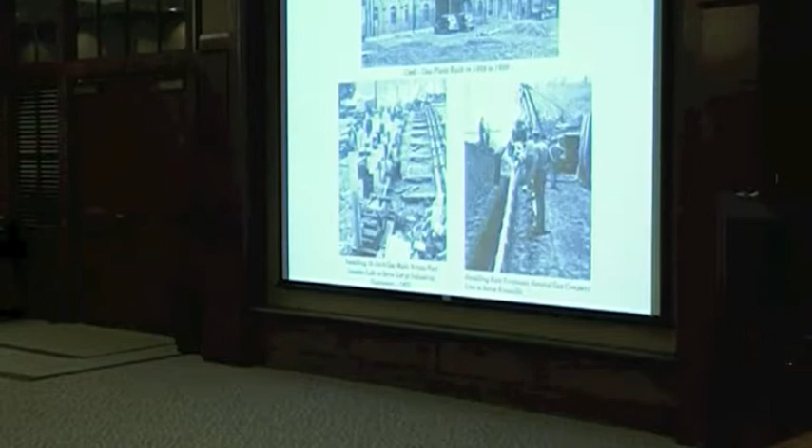In the lower pictures, you can see a picture of the old style installation of the pipe. You can see all the joints in the pipe right here that you wouldn't find today. And on the right-hand side is a picture of the pipe actually coming into Knoxville from the interstate pipeline—a very big change for the system here.

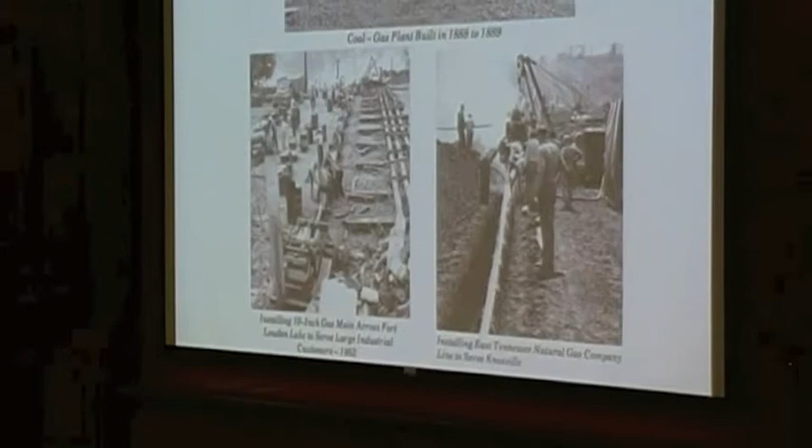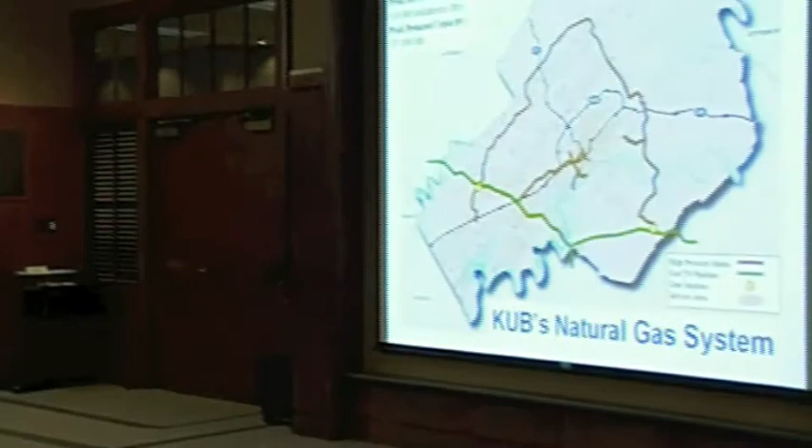We're served by a natural gas pipeline, East Tennessee Natural Gas. It comes into Knox County right about here, which is roughly the intersection of Pellissippi Parkway and Melton Hill Lake. The pipeline comes over right about there. It then transverses the county to right here, which is basically Topside Road, Alcoa Highway, right where we enter into Blount County. And it exits the county over here, which is roughly by Chapman Highway, right about where Seymour is. So the pipeline bisects the county like this.

We have a series of high pressure lines, one that loops all the way around from point to point, these yellow points being where we take gas. We take gas from the pipeline to 2 major points.

We have a system that loops all the way around from point to point, providing access to our system going both directions, feeding both into and out of the system. There's also another high pressure line that comes right into downtown Knoxville. All the little yellow lines you see here are the actual distribution pipes that are in your neighborhood and on your street. That's a representation of our system right there.

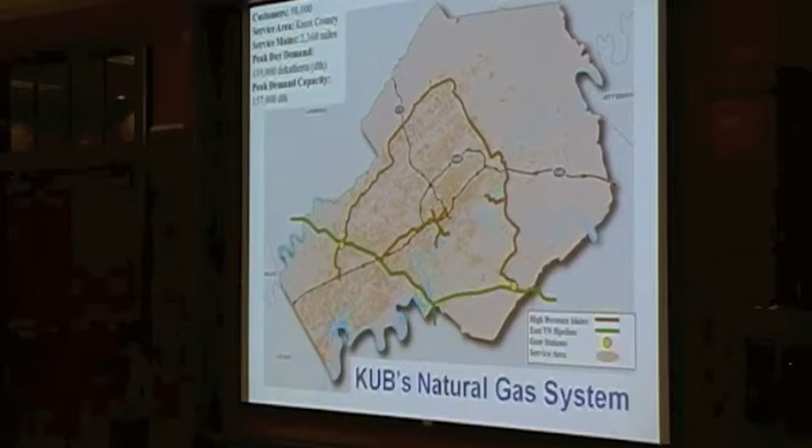A little bit of history. Let me switch gears now and talk about a different aspect of the gas system, which is the fact that it is very highly regulated. The first regulation came down in 1970. Prior to that time, gas systems like ours and others were regulated, if you will, by best practices to some extent. In 1970, that changed with the passage of the Pipeline Safety Act.

Since that time, and even more recently, there's been more and more regulations that have come down. To a large extent, regulations are formulated in response to various incidents that occur out in the domain, and they've taken different forms over time.

For example, the control room management program. That's a regulation that dictates how long your employees can work in the control room, the number of hours. There are regulations that establish the drug testing requirements for our employees, and regulations that establish the training they have to undergo and the way they are certified to do their jobs. And more recently, the most recent regulation is the Distribution Integrity Management Program, or what we refer to as DIMP.

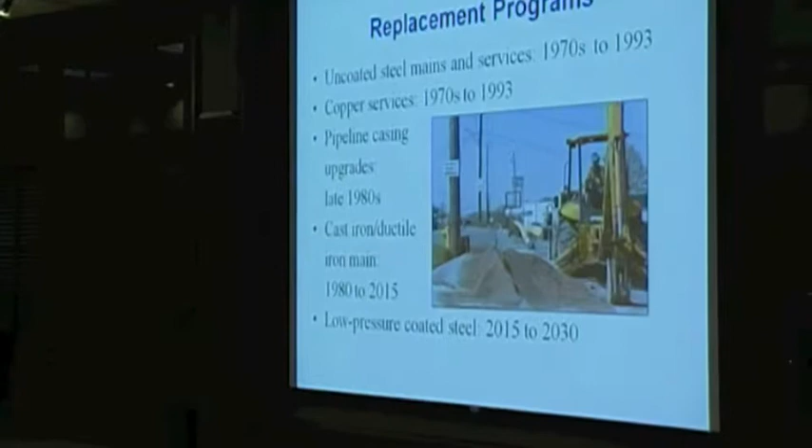Starting in the 70s, not coincidentally about the same time regulations came out, the gas system started with some fairly significant replacement programs. The first one was to replace the uncoated steel. Next, copper services, we replaced pipeline casing upgrades. For the last 30 years or so, we've been working on replacing the cast ductile iron pipe. That's supposed to be finished in a couple of years, in 2015. After that, we'll move to our low pressure steel pipe.

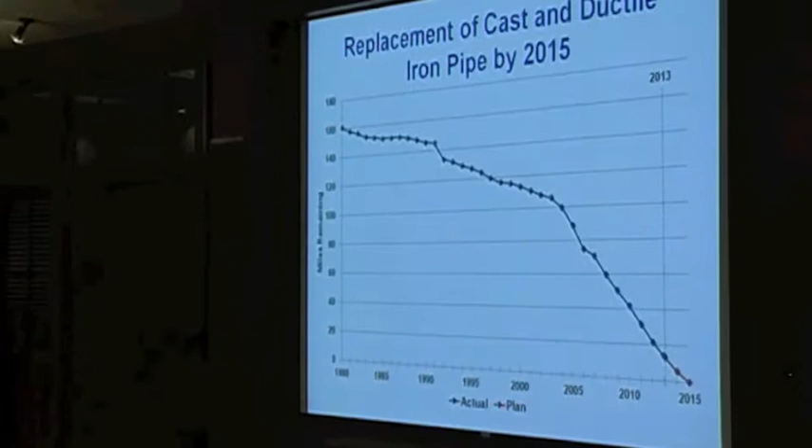While we have it on the chart here and listing all these things, I think it's more dramatic to think about it when you look at it year by year. This is actually the replacement history of our cast ductile iron pipe. And you'll see that we started out with almost 160 miles of pipe when we started the program. And now, as we're towards the end, we've got about 8 to 10 miles left to be replaced over the next 18 months or so.

The only way you can get 160 miles of pipe replaced is to do it methodically, systematically, consistently. The idea that you can make progress on replacement programs in a start-stop mode just doesn't work. All these programs from the previous slide, whether it was uncoated steel mains or cast ductile iron, are all programs that have to be multi-year long, multi-year funded, multi-year thought about. And that's one thing that's really consistent among all of our utility systems, is everything's a long-term investment, long-term outlook.

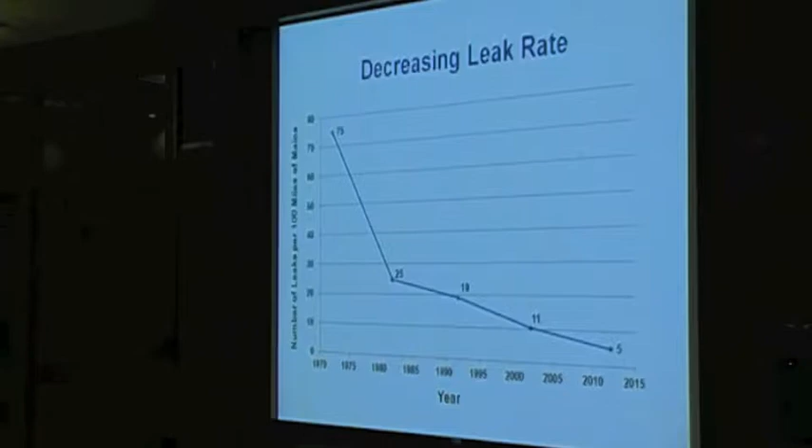Now the benefit, and the reason you're going after all these replacement projects, is the significantly reduced leak rate. If you go back in time and look at our leak rates per 100 miles of main, you'll see it's dramatically decreased. Just over the past decade, we've cut the leak rate on our system in half, going from 11 down to 5. So the proof's in the pudding, if you will, and the benefit of all the replacement programs we are undertaking is shown fairly dramatically right here on this graph.

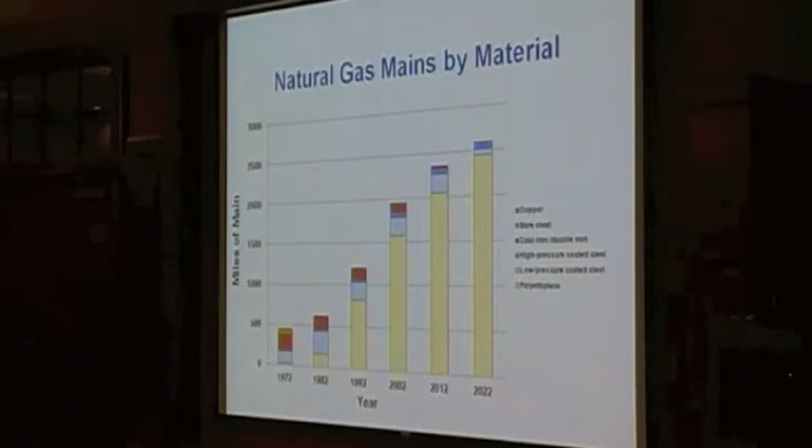So the combination of the history of growth and the sustained 40-year effort toward replacement programs has materially changed the system, materially increased the safety of the system, and the reliability of the system as well. What's the life of the polyethylene? Well, we'll talk about that.

Before you do that, yes ma'am. Can you tell me in what situations the high-pressure coated steel is more appropriate than the polyethylene?

Yes, the polyethylene has a pressure rating depending on the pipe. We don't run it more than 60 pounds. High-pressure steel can run 200, and depending on the grade, up to 600 pounds. We don't currently have anything over 200, but we'll likely have something around 400. So it's a capacity issue. That's what it is.

Chair Anderson asked about the life of polyethylene pipe. Now that we're 90+% relying on polyethylene pipe, let's spend a little time talking about it. If you look at the polyethylene pipe in our system, here's the history of its installation. It's a representation of the growth spurt we endured over a couple of decades. We were putting over 100 miles of pipe in the ground a year at one point. Very dramatic. And that pipe is fairly new in the world of pipe.

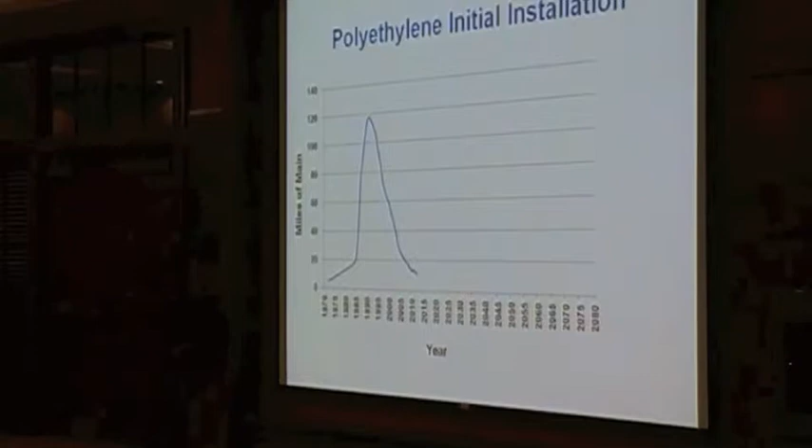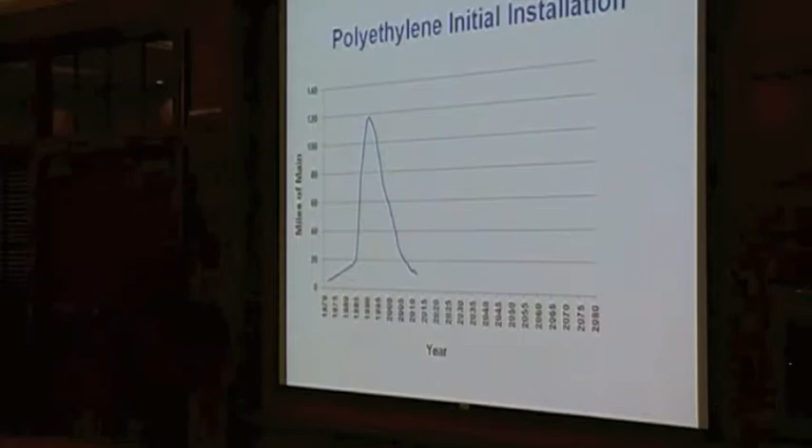And we actually brought one here with us. You can pass that around, Gabe. I thought the question would come up. So here's a piece of polyethylene pipe that was dug into, which happens from time to time. What I want you to look at is the manufacturer's mark on it. It runs on every piece of pipe. There are markings.

That piece of pipe was manufactured in November of 1973. That pipe was dug into, we had to repair the leak, so we cut that out. There's the piece of pipe. There is nothing wrong with it other than somebody dug into it. And that piece of pipe is 40 years old.

The reality is the industry is making a guesstimate on how long polyethylene pipe is going to last. The suggestions are somewhere between 50 and 100 years, but that's yet to be determined, I suspect. So for our intents and purposes, we drew another line here at 60 years. We said, what if the pipe lasts 60 years? What do we need to be doing?

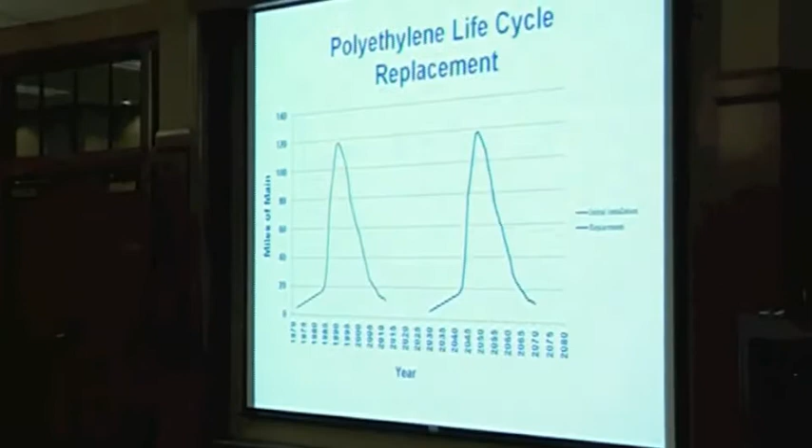What this represents is, let's pick a year, 75. In 1975, we put this pipe in. The pipe lasts, in theory, 60 years. Help me with my math, Gabe, so around 2035, we would need to replace that pipe. So this is the installation time frame, and this is the replacement time frame, in theory, if the pipe lasted 60 years.

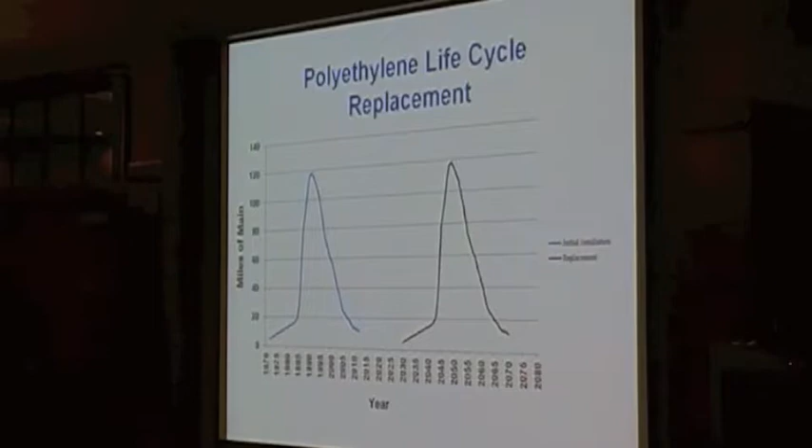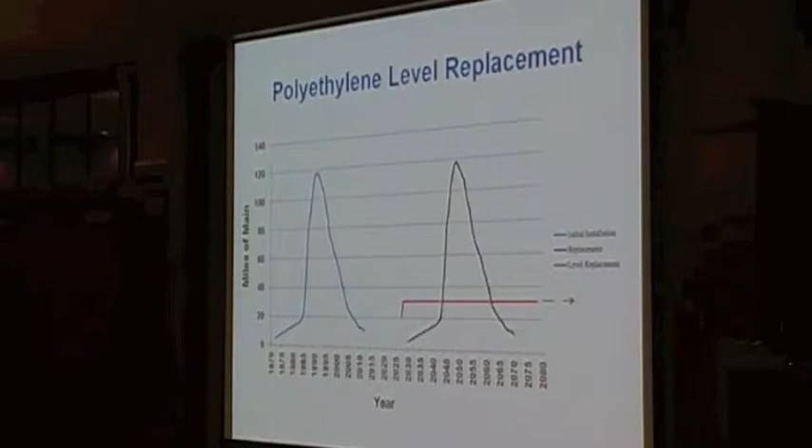So we'd be facing the same type of accelerated replacement cycle in the future as we did on the installation side, which is not ideal. A more planned approach would be to levelize that over time. Just like with all the other replacement efforts we've undertaken, a systematic, methodical, planned approach makes more sense than one where you're ratcheting up and down so dramatically.

The red line illustrates what kind of replacement program it would take to replace the same amount of pipe as the black line. In other words, the area underneath the red line is the same as the area underneath the black line. You've just stretched it out over time and levelized it. That's a potential replacement program for the polyethylene pipe. The reality is we're not sure, because we don't know how long the pipe will last.

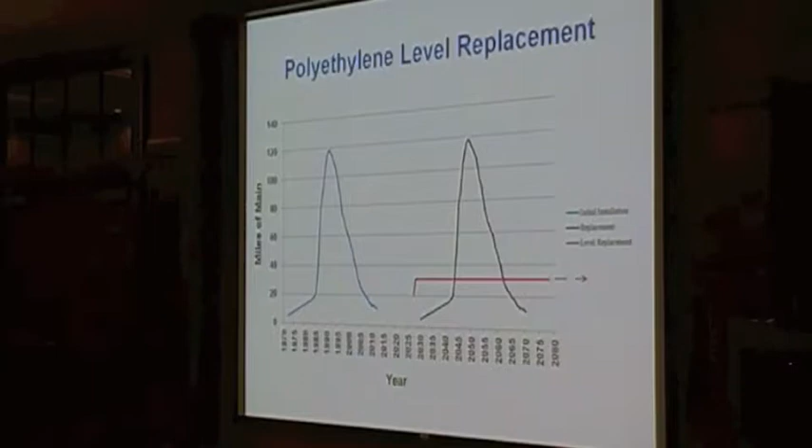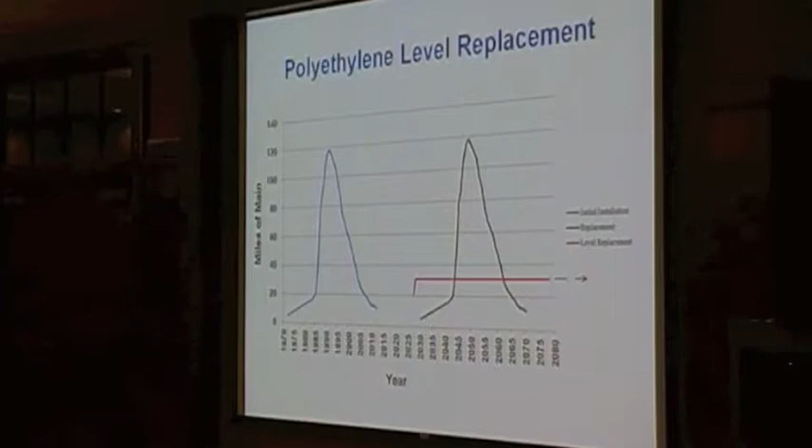But let me point out, if you look at the dates here, the start date is 2030, and we're sitting here in 2013. We've got a little bit of time to think about this before we actually have to get involved. And we'll talk about that a little bit more.

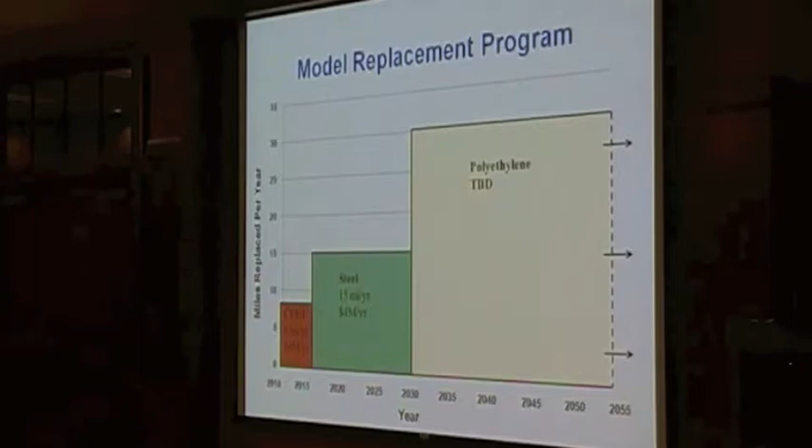If you look at what we're doing on our replacement programs right now, we're spending about $4 million a year, and have been spending about $4 million a year replacing cast ductile iron pipe for the past 20 years or so, replacing about 8 miles a year. That's fixing to be finished. We'll then be moving into replacing our coated low-pressure steel pipe for the next 15 years after that, spending about the same amount of money a year, about $4 million. The budget has stayed relatively constant for that time frame.

We'll be able to replace a whole lot more pipe of the low-pressure steel than the cast ductile iron. Cast ductile iron that's left in the system right now is in Chapman Highway, on Western Avenue. It's big pipe, in big roads. The low-pressure steel will be replacing going forward. It's primarily smaller pipe, primarily in neighborhoods. We can get more pipe replaced for the money. So we'll move right into replacing the steel.

After that, if you were to do that line I drew in the previous chart, polyethylene, all of a sudden you'd have to jump up there to start replacing 30 miles a year. But the truth is, I don't know when we need to start doing that. I don't know the timing. I don't know how much it's going to cost. I don't know the rate at which we need to be doing that. And honestly, it's not because of us—it's because I don't think the industry knows just yet. As time goes by, the industry will figure out how long the pipe's going to last, what the replacement rate needs to be, and how much it's going to cost.

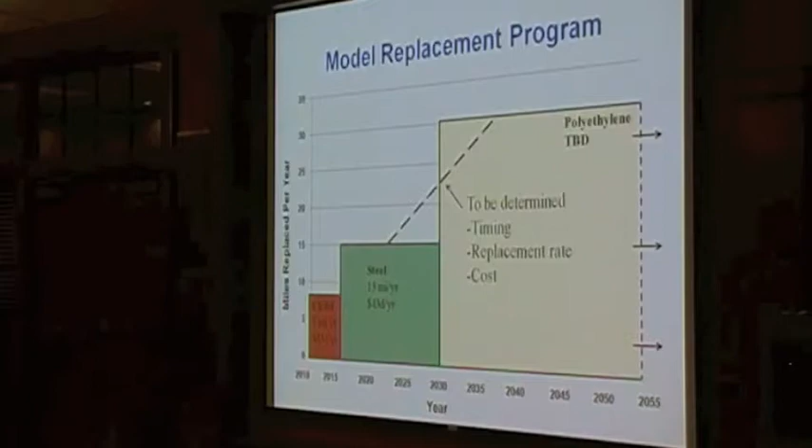For our planning purposes, in our financial models, in our five-year plans, there are no costs associated with replacing polyethylene pipe. That's for a future budget, for future years, for future planning. But it is something that's going to have to be dealt with sometime in the future. Whether it's one decade, two decades, three decades from now, a future KUB board and staff will have to deal with the history of the rapid increase we saw during the 80s and 90s in the gas system.

Now, that covers sort of the base of the gas system. We're highly regulated. We've got a lot of history. We've got a history of aggressive, ongoing replacement programs. We're increasing our safety by decreasing leak rates throughout the system. At the same time, we have been building the backbone of the system, and we continue to look for strategic projects from time to time.

This coming budget year, the next couple of years, has within the budget another strategic project that Gabe Bullis is going to talk about at this point.

Thank you. Before I get into that project in a lot of detail, I want to give you a little bit of history—it sort of ties together. This has been a 60-year plan. So I'm going to start back when Mike referred to the very first natural gas pipe we built in '51. I want to start with that and work our way to today.

You'll see in 1952 we had built our first high-pressure distribution main to the middle of Knoxville. We call it the Knox Lateral. It's still in service today, and we've come off a pipeline that's still in service today. So that's how we looked in 1952. Gas was new. It was in the middle of town. That was all the growth we had.

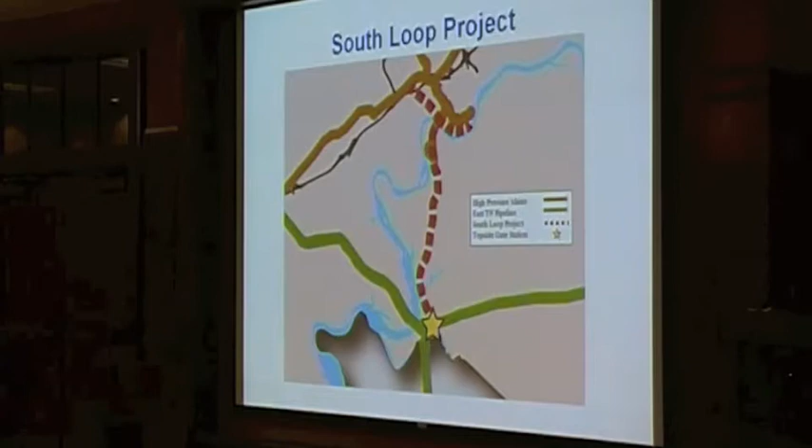As I mentioned earlier, UT approached us about two years ago about what we could do to further help them along. We knew we wanted to do this at some point in the future, didn't know when. They asked if they could contribute to help get this built for our system. Of course, we were glad to have a partner in this, and they're willing to invest $9 million in this $23 million project. That contract's been signed, and we are underway with the design.

What does it do for UT? It significantly improves air quality for the Knox County area. UT is one of the top 10 producers of emissions due to their coal burning facility.

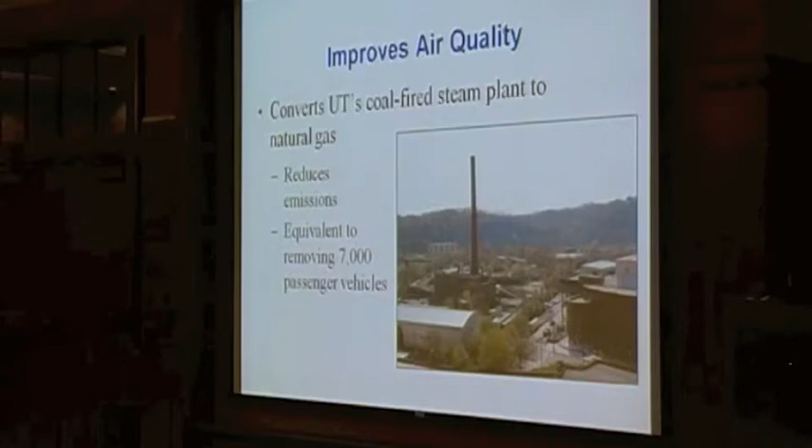They burn coal today to make steam, and they want to convert that to natural gas. So when this project is completely done, not only will UT be KUB's largest customer by a large factor, but it'll also be a huge reduction in our emissions in Knox County.

They'll get rid of a lot of the particulates and greenhouse gases that naturally occur with coal burning, to the point that it'll be the equivalent of removing 7,000 cars from the roads of Knox County in a given year. So it's a huge project for them, along with us.

You see the existing coal stack there. If you've been to Neyland Stadium or Thompson Bowling Arena, it's right beside them. They'll keep it there, but it will be out of service at some point.

We're probably about 4 to 5 months from being complete, so we're significantly underway. We had public meetings a couple years ago to make sure the residents around this area were okay with what we wanted to do. Some of the suggestions were to build a nice pretty wall - we did that, we're doing that. We're going to, in theory, bury it and hide it.

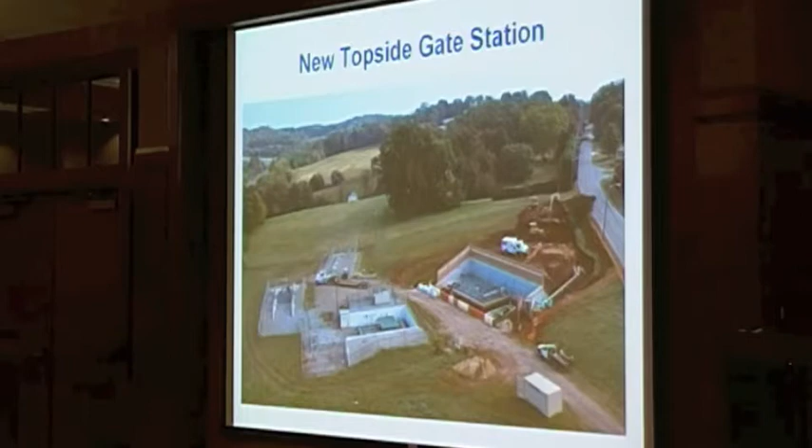So what's next? What's left? I talked about earlier, we have completed the bore under the river - that 3,000-foot section is complete in the ground. Topside Road is right there, it's under construction, will be done in a few months. So what we've got left to do is figure out and determine the route between these 2 points.

We have just begun what I call a preliminary study, trying to find the best route. We will go with one route - either a west of Alcoa Highway route or an east of Alcoa Highway route. It won't be both, it'll be one or the other. We'll look at the best, least invasive route to do that with.

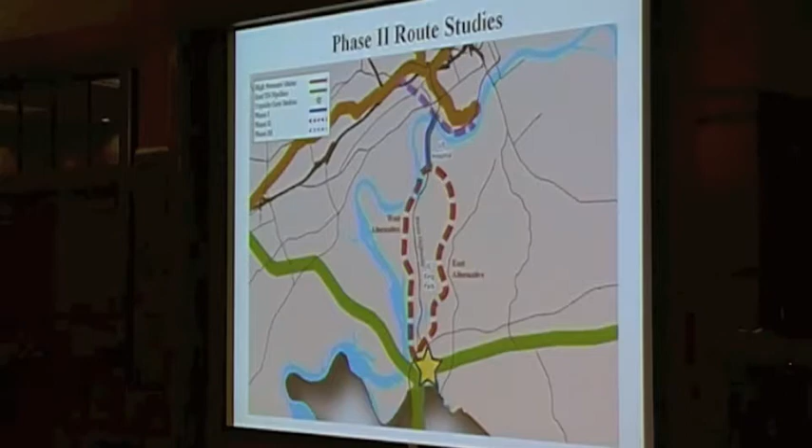Once we determine that route, we'll again have a public meeting, invite the public, those affected by it, and then we'll also come back to the board and present what we're recommending. So we'll be doing that over the next 2 or 3 months.

In parallel, we also have to build the line from where the pipe came out on the other side of the river, north to Middlebrook to tie into our existing Knox lateral, and also build the line to UT to their existing steam pipe. But those can be done in parallel, and those routes are going to be determined also in parallel while we're doing this design.

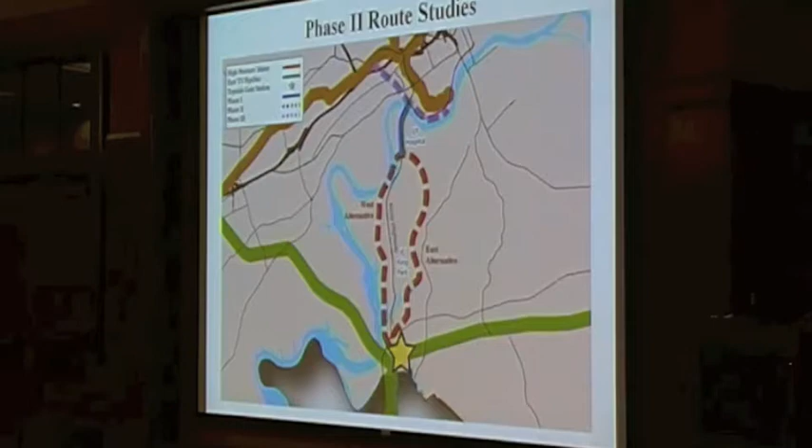If I may, is this a type of construction with a lot of digging - you don't bore underneath, there's no damages, you have to dig?

It's open cut for the most part, it's a very open cut. Some refer to it as some of the North Loop. There'll be some cross country - you're kind of looking at routes that are more open area, but it'll be an open cut. There are a lot of companies that do this for a living. This construction, this project will take less than a year once we get the route determined and get all the appropriate paperwork done, but it will be that way.

And does the UT conversion of their plant, is it contingent on us getting the pipeline there, or what's their timetable? Yes, when we signed the contract, they want to take delivery of gas by November of 2015, so we've got 2 years from actually this next month. So we've got that in contractual agreement, and they're aware of where we're at, what we're doing.

So Gabe, we already have a high pressure main that runs essentially there. Is it just a question of capacity? We just can't meet the capacity? What they have today is a 6-inch line. It's not able to take the loads they want to have.

Right, I guess you're talking about this line right here, that runs to UT. We need to run a larger diameter pipe to meet their demand so we can convert that plant fully. Will it be just for UT, or will it also serve demand in that South Knoxville area?

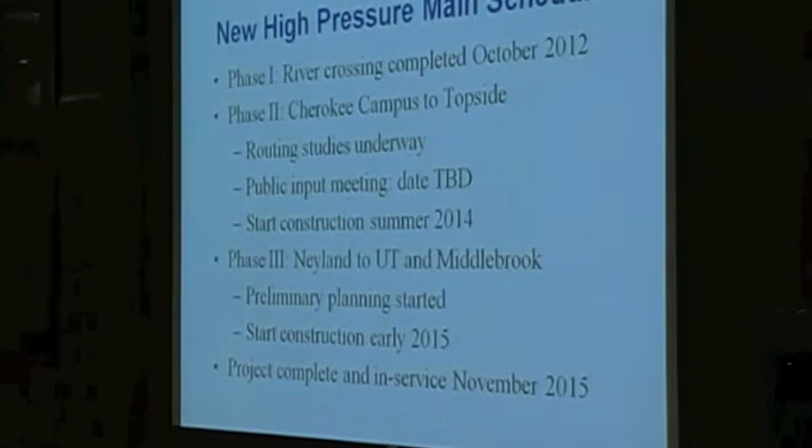The river crossing was completed in October 2012. It's tested and ready to be hooked up to the main system. Phase 2 is the Cherokee campus to Topside Road, a multi-mile run from Topside to the campus. Routing studies have just begun. A public input meeting will be in the next few months, with the goal of starting construction by next summer.

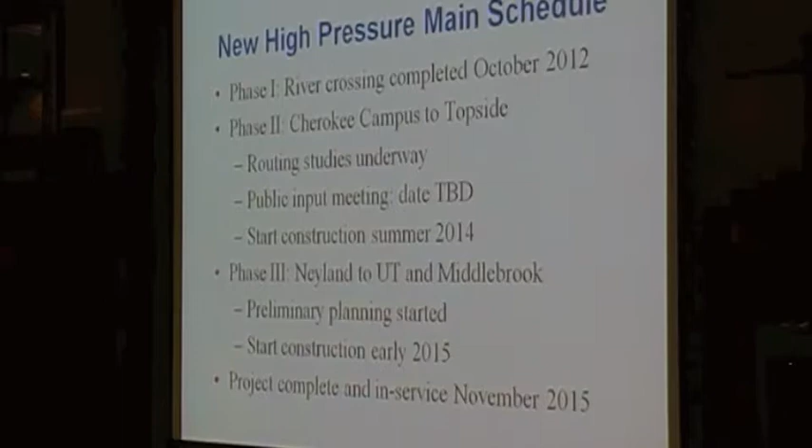Any questions? And is this known to the public yet? The Topside Road Gate Station, we've made people aware of what we're doing. And then of course the river crossing—UT's been fully engaged because it's on their property from end to end. The next phase is to make the public aware of this and make it a more public project. We had just not gotten to that point.

We really don't have a route to give anybody just yet, but we will publicize it quite a bit. So I was wondering, has the chamber started using this as a marketing tool for growth? It's a good point—we have not talked to the chamber about that, but they probably will. When the chamber comes with any new customer, we look at the system as a whole, and so far we've not had a problem meeting anybody's needs. That's always been a positive for KUB, with the planning and growth and pipes we've had. But this will definitely be more of a catalyst for that, yes.

We don't push gas or electricity, is that right? No. To the customers? You mean market? Do we say buy this, don't buy that? As far as one versus the other, no, we do not. I guess we use it as fuel neutral, but yes, we'd like for you to take both.

And is the laying of this pipeline as—I was going to say invasive, but—disruptive to traffic as some of our other projects? The routes we're looking at right now, the answer is no. We're not looking at anything this size against a major road—it's not like that. We're not looking to put it under any major roads.